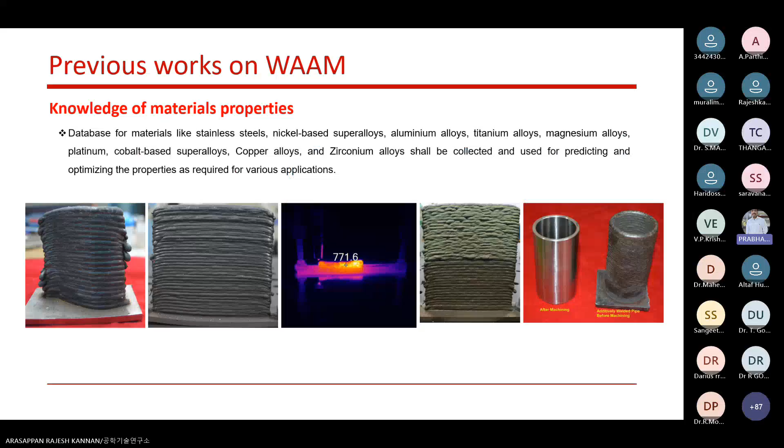ICT Academy's Mr. Altaf Hussain Khanday is going to give an interesting session on generative design workflow using Fusion 360. Fusion 360 is the first cloud-based CAD tool which integrates all aspects of design, manufacturing, and simulation, making this session very useful for design-oriented engineers.

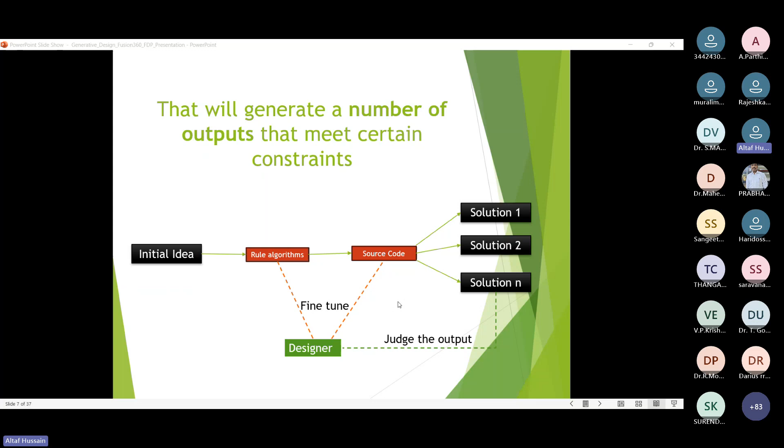So this is the process generative design follows. That's how we create design: we give an idea, the software works, and we get a design, right? And one more thing, this generative design, as I told, is an AI-driven approach. We give some conditions to the software and it gives us a solution. Before, we would first design and then test. We would create a design manually and then test it, so it was time consuming, right?

But now with generative design, we are just giving conditions to the software and it is giving different solutions to us. So we are simply exploring the designs, solutions, or outcomes. So it has saved us time. It even gives us an idea of what design will be suitable for you, because it gives us different options. So we can explore our outcomes and select the proper one, right?

So now generative design has changed it. First we were designing and then testing. Now we don't do that. We just define, it gives us solutions, and then we explore those solutions. And not only one solution; as I told you, it will give hundreds of possible solutions, and then we can compare them and get an optimal solution.

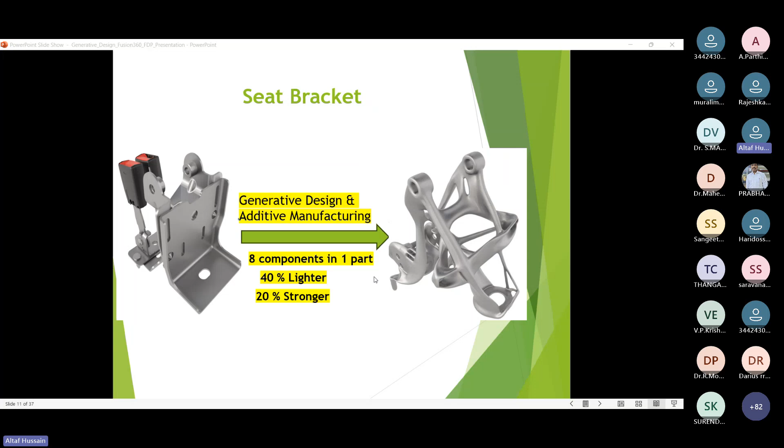As I told, there will be different solutions out of different outcomes. We can get a novel solution. We can work on that. If we want to do some modification, we can do that. And then we can create form tools, or we can create an organic structure. We can create some mesh designs, and then we will use that particular design for additive manufacturing and create a final product. I will show you those things practically. So for this particular component, we got different solutions, and from among them we selected the better one, right?

Okay, so now I will just go quickly to this one because it's more practical. If you see the evolution of design tools, in traditional CAD we were just using the geometry, manually creating sketches and then creating a design, right? Then we were testing that design. After that, we got topology optimization that removes unnecessary material. I will show you that also in the Fusion software, how we can remove the material, how it works, right?

But it is more time consuming than generative design. But it's very good. Actually, we are still using this shape optimization. Even industries are still using this one, but now they are trying to use generative design. But mostly they are using this shape optimization process to create a final product. So now we have generative design. It creates thousands of solutions, and it saves us time. So this is the age of generative design, right?

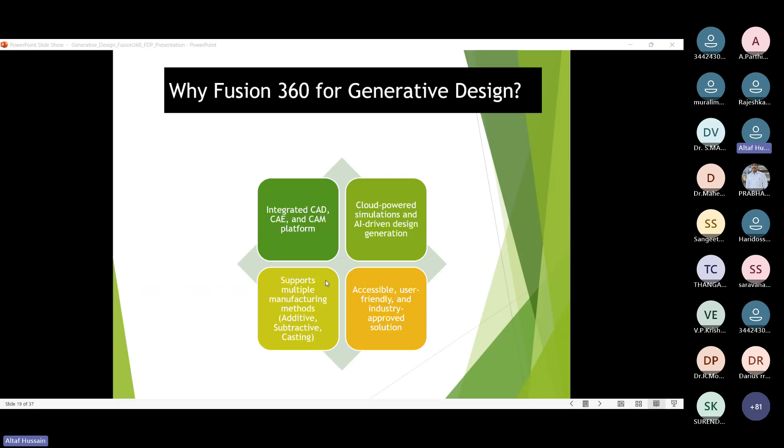This is the thing you do manually, one by one. You have to follow all the process. This way, you get a final design by using topology optimization. But in generative design, as I told you, we simply give some conditions, right? And we get a solution, and then we can modify that and create a novel solution.

So I will go practical with this one. I will open the software and show you first how we can do the shape optimization, because industry still uses this method. For generative design there are some challenges also. I will talk about that later, because we mostly use additive manufacturing for that.

For traditional manufacturing, we use milling or casting processes. But for generative design, we mostly use additive manufacturing. So there are these challenges, and that's why some industries still follow shape optimization. Let me now go to the software and show you practically how we can do these things in Fusion.

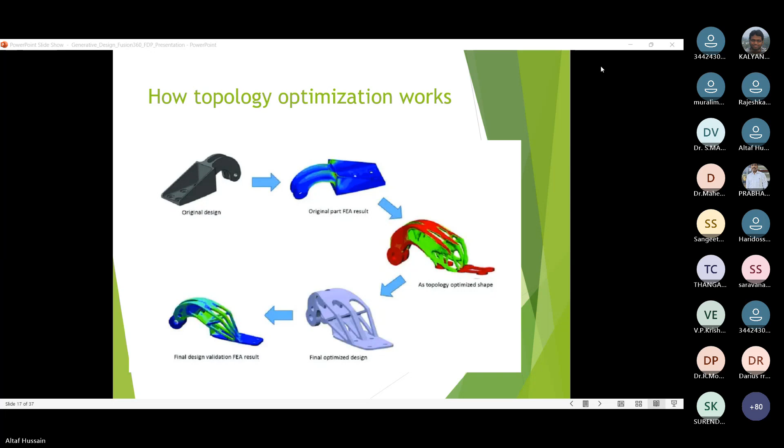I need to share it once again.

So this is the software. I hope everyone has this software. If not, as I told you, it's economical software. It's free for students or faculties. You can just create an account from Autodesk and use this software. It's very important, and you can do different things using Autodesk Fusion.

I want to show you first shape optimization, then compare it with generative design. For that, let me quickly create one design from here. I will select this reference plane and go for the sketch. Let me create some circles. I will create a wheel, do the shape optimization on it, and we will see the final results we get, right?

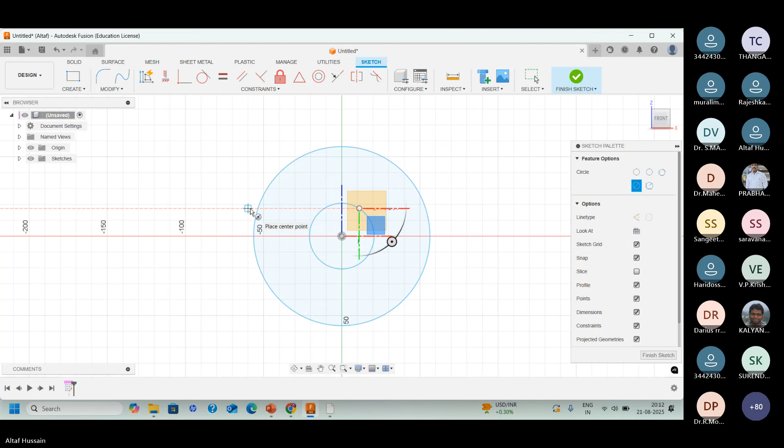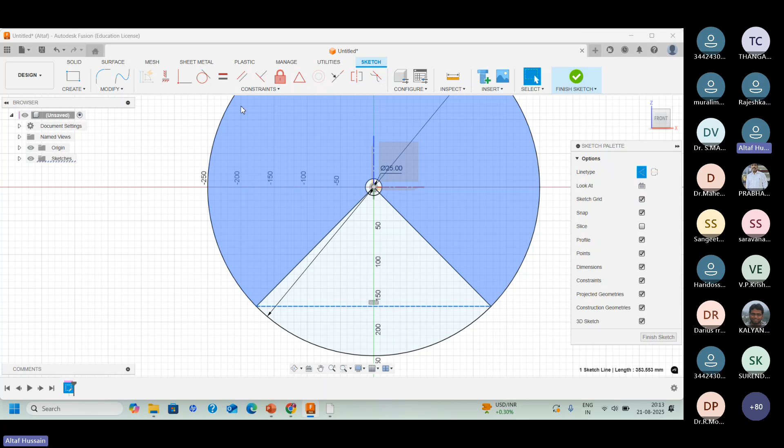I will create a circle, then one more circle of diameter. Before going on, I kept the units in millimeters. This I will give 25 mm, and for this one, 500. I will create one part of this wheel with a line from here. Make it horizontal, give some constraints. I will also give an angle to this one.

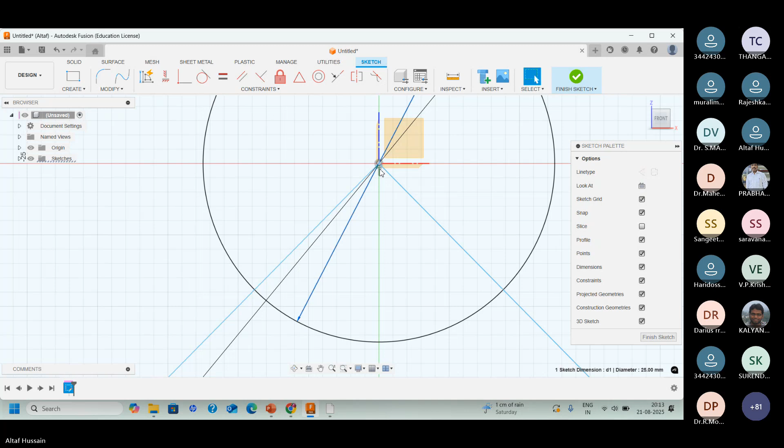Let me delete this one first. Dimension. Actually, it's auto, so I need to change it. Let me delete this one, because I have already applied a constraint. Once you apply another, it will be over-constrained. I hope you have used Fusion. You can just delete these if it happens, because it becomes over-constrained, so you have to define it properly. Let me delete this one also.

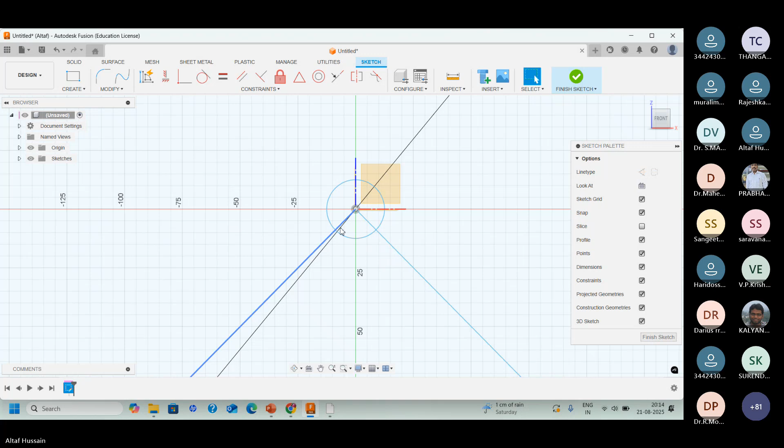Now let's give the dimensions: 120. And I will create one more line from here to here, make it horizontal, and make it a construction line. I'm just trying to create one part of the wheel. Now I can go to Solid and select Extrude. I will first delete this part, then extrude this one up to 50.

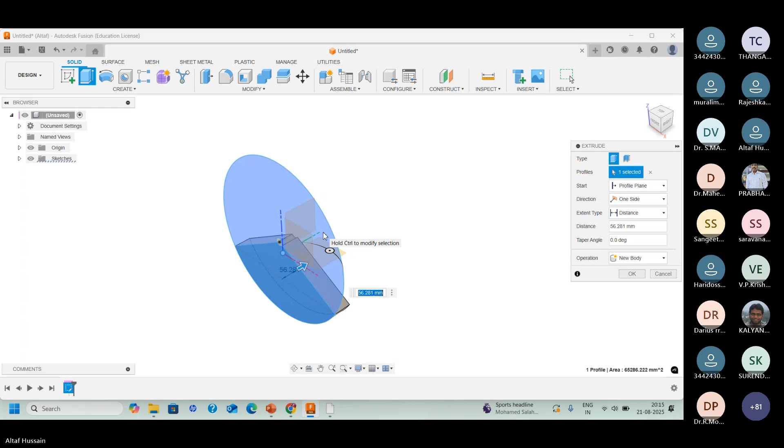We can get manually 50 mm. Okay, so you can see we are creating parts manually for the shape optimization. I have created this component, this part. Now I will go to the shape optimization. So how do I go there?

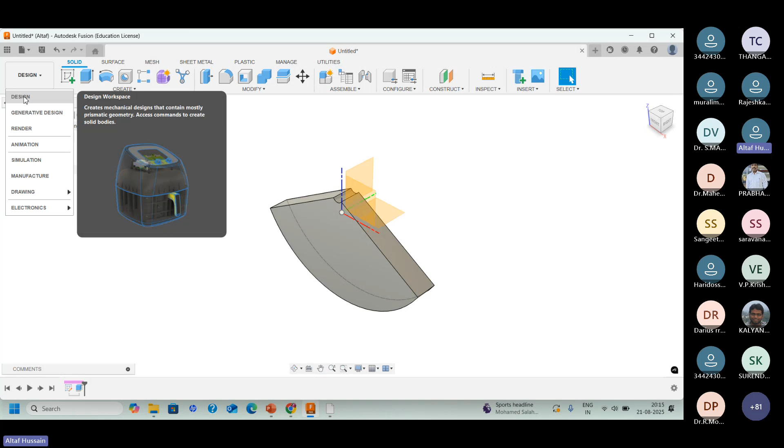You can switch the workspace here. We have a design workspace, then we have a generative design. I will come to generative design later; first I will go to simulation. Here you can see the simulation workspace. If I select the simulation workspace, you will see we have shape optimization. I will select this one and go for create study.

So I am now in the shape optimization workspace. Here also we have to follow some conditions. I want to analyze this particular design or this particular part. So I will go here and preserve some region. I will show you preserve geometry and obstacle geometry. These two tools are very important in generative design. Here in shape optimization also, they are useful.

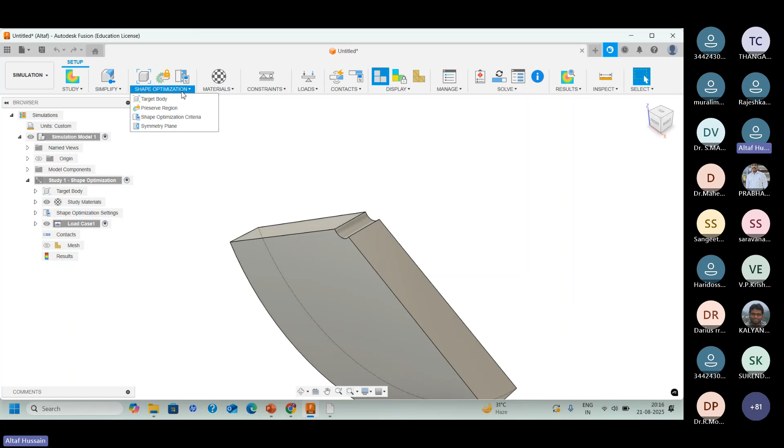I want to preserve this particular area, because suppose I want to insert some bearing or some shaft here. So I will preserve it, I will preserve the shape of this one. I will select this area and just make it 25 radius. So this area is preserved, fine.

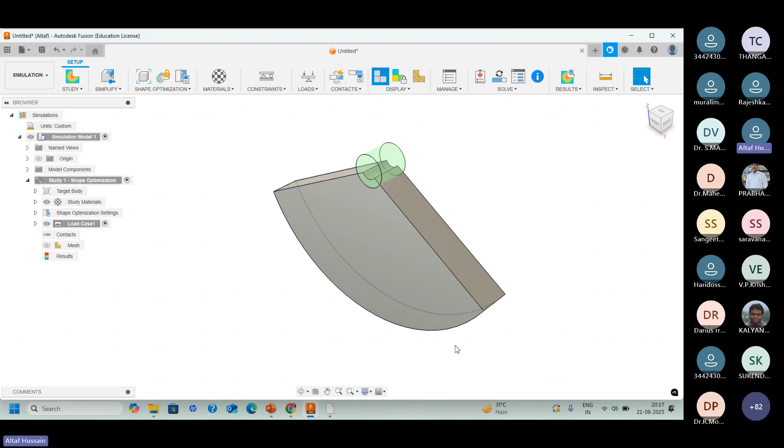Now, as I'm doing shape optimization, we are applying some conditions to this particular design, and then we want to see the outcome, the result of using shape optimization. So now I will apply load conditions on the perimeter of this wheel. This is the perimeter of this wheel. I will just select this one and apply loads.

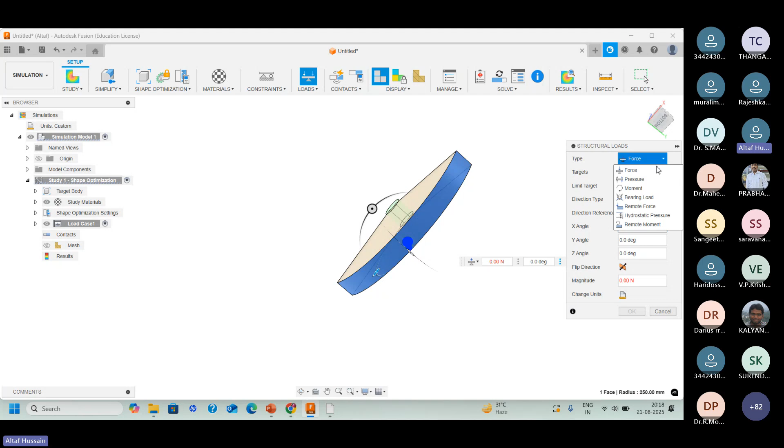If you see here, suppose let me apply the pressure, and the magnitude can be anything, suppose 10. I will get 10 value. Okay, fine. So I will select this one, and you can see I have applied some conditions to this particular component. Here I have kept this one preserved, and here I applied the loads. This load will be applied constantly on this part, the perimeter of this wheel. Fine.

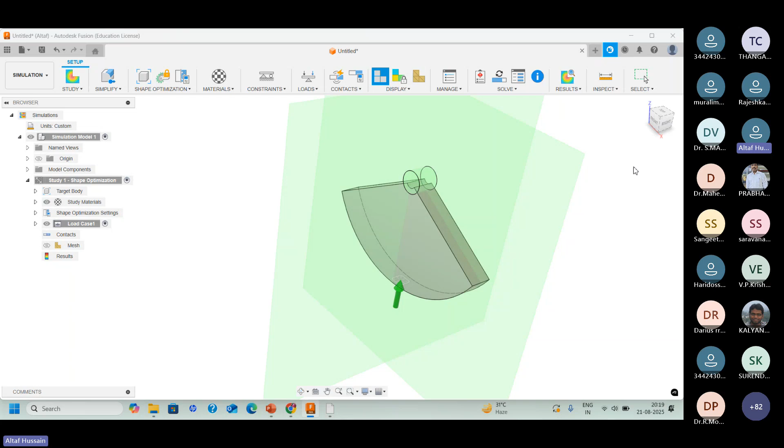One more important thing in shape optimization: you can see symmetry plane, so that there will be a balance of pressure applied on this part of the wheel. I will select this one and select two planes, active planes 1 and 2, so that a balanced pressure will apply everywhere on this part. Okay, so these are the things you have to follow in shape optimization.

There are lots of tools there, but I don't want to go into those, because my main topic is generative design. But I want to show you because shape optimization is the foundation of generative design. That's why I want to show you this also. You can see I have done this.

Now I want to go for the mesh. I will divide this component into smaller mesh, smaller parts. When you are using analysis software, we are using FEA, so we create smaller parts of our component so that we can get a good result. Let me just decrease the mesh size and click OK. Now I will go and solve this one.

So you will get a solution here. I will just generate this one. Just a minute, it will take some time. I have created a small part, because otherwise it would take so much time with a complex design. In this small part, I will show you how we can create different solutions, how we can modify the outcome of this shape design. So let me just... it's not.

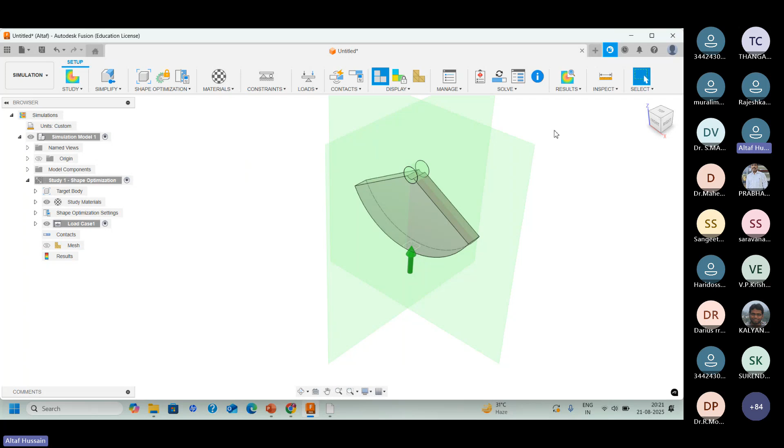Okay, one more thing we have missed here: constraint. There should be at least one constraint applied. So I will go here, constraint, structural constraint. I will fix this particular area and make it fixed. Now I can pre-check whether all are set. So now everything is set.

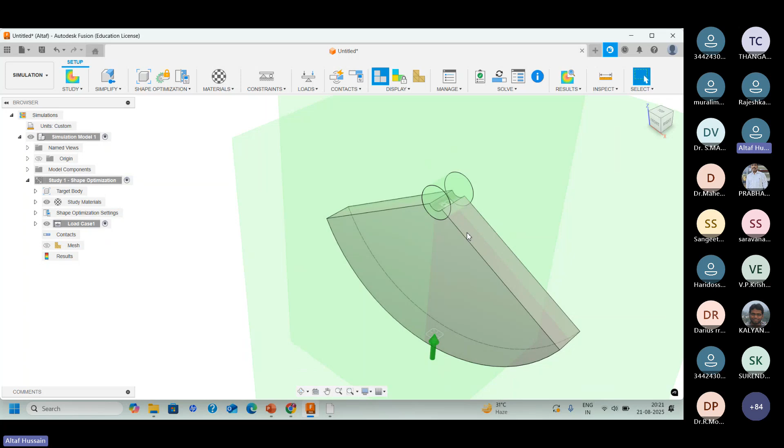I have followed all the conditions and all the steps properly. I will select this one, click OK, and now I can solve it here. I will get some solution. It will take just 2 or 3 minutes. Let me save it somewhere.

Okay, it will take some time, just 2 or 3 minutes, because I have just created a simple part. With that simple part, I can modify it and create a design. You'll get an idea of how we can create a design from an organic structure, a referenced image, or a general design. From that, we can modify and create a solid design, which we can then use in a manufacturing unit. It will take just 2 or 3 minutes to complete, and we will get a solution. With this small part, we can create some design, or I can say I can create a wheel.

Then I will go here. I will just move to the generative design until it gets completed. I will open a new workspace and keep it aside. If you want to do generative design in Fusion, here you will see we have a workspace called generative design. In generative design, I will explain what you have to do in Fusion, how we can create a generative design.

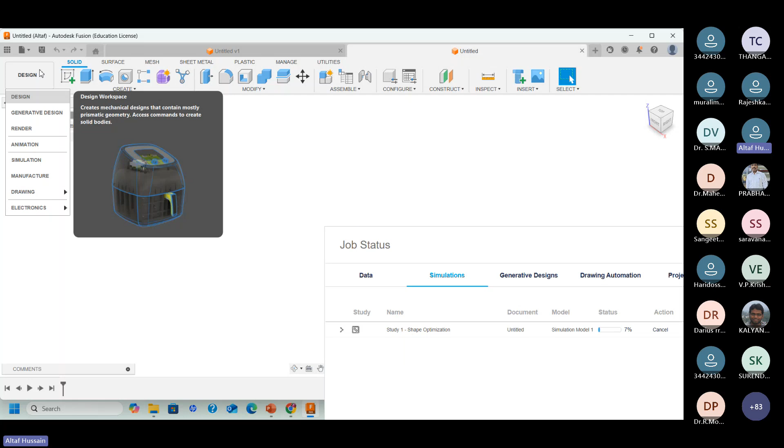As it will take time for me to create a design, I already have some designs available here. I will use them so we can see how we can create different outcomes by using generative design. Otherwise, you can try here yourself if you want to practice. You can get these things from the data panel also. Go to the data panel, scroll down, and you will see 'generative design samples'. You can click on that, and you will see different samples available in Fusion that we can use for generative design.

So here is a GE bracket. Actually, I wanted to talk about the GE bracket, but first I will complete one here, then I will talk about this - what is the GE bracket, and how it created the base of generative design. So here I will open the GE bracket.

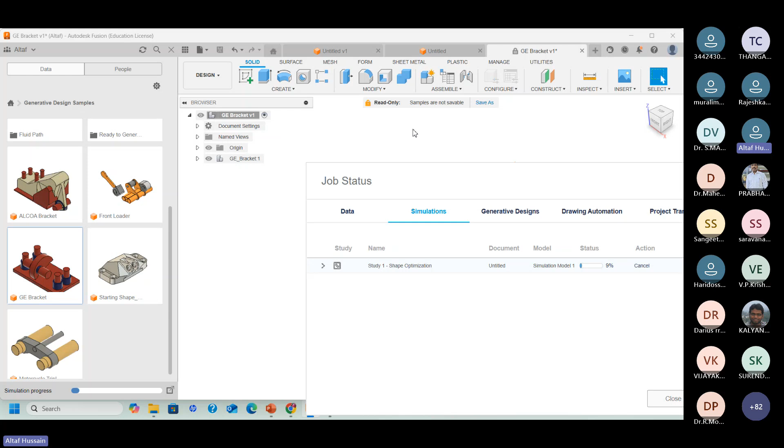This GE bracket is actually used in the aviation industry, in jet engines. So this GE bracket is used for that, for the aviation industry. I will later talk about the GE bracket also, how it has saved thousands of industries by using generative design, how they have changed from the traditional view of design to the generative design - by using the GE bracket.

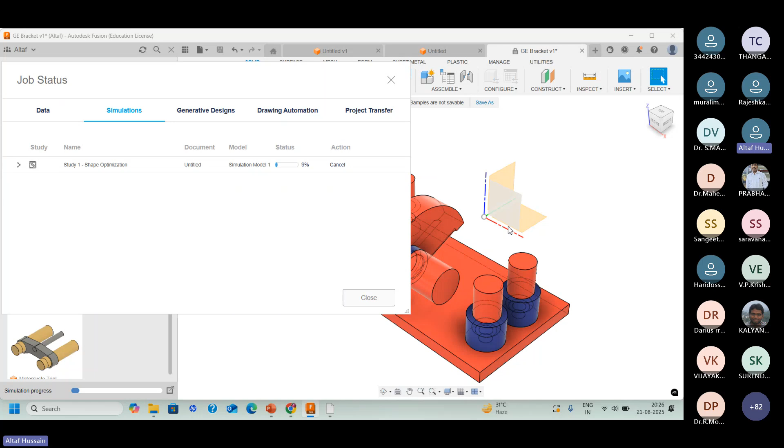Okay, so this is a simple image of the GE bracket. Only some components are there, right? Here we will be applying some load conditions to it, applying some parameters to it, and we will see how many solutions we get after applying these conditions to this particular body.

Okay, so here we have different things. We have to follow one by one. First thing, you have to save this design. As you can see, this is locked right now - GE bracket is locked because I just used this from the sample. So I need to save it first, then I can edit this one. I will go here. Let me first close this one. Later on, I will see this result.

Okay, so I will first save the GE bracket. Go here, file, and then we have save as. So I will save GE bracket in some location. Now it is editable, so you can edit this sample.

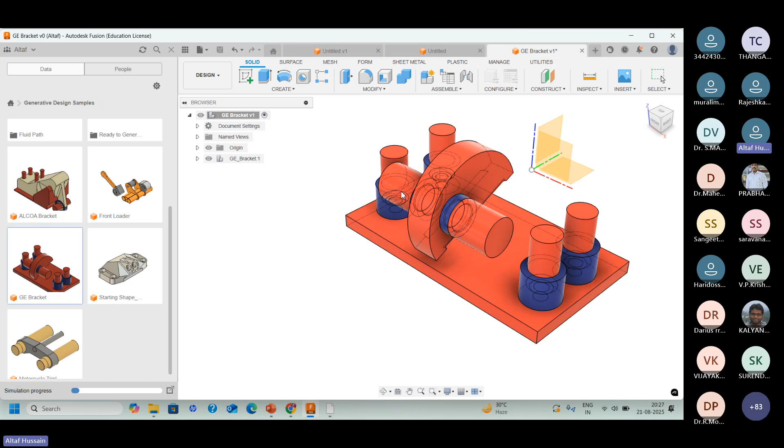Now I will show you how we can follow the generative design in Fusion. Here we have a generative design workspace, and you have two sub workspaces in generative design. We are going to do the structural component, so we will go to study case and create study. Here you will see different tools that we use in the generative workspace. I will show you one by one how we have to follow this.

If we don't follow properly, then we cannot get a better solution or a better outcome. We have to keep in mind that we have to follow all the steps properly, then only it can give us different outcomes with different properties or different solutions that we can then compare and get a design.

So you can see, okay, this one is complete, my shape optimization is completed. I will go to this result later on. Let me first complete this one also.

Okay, so you can see here you have to remember two things: preserve geometry and obstacle geometry. So what is preserve geometry? What things you want to preserve and what things you want to select as obstacle geometry, right?

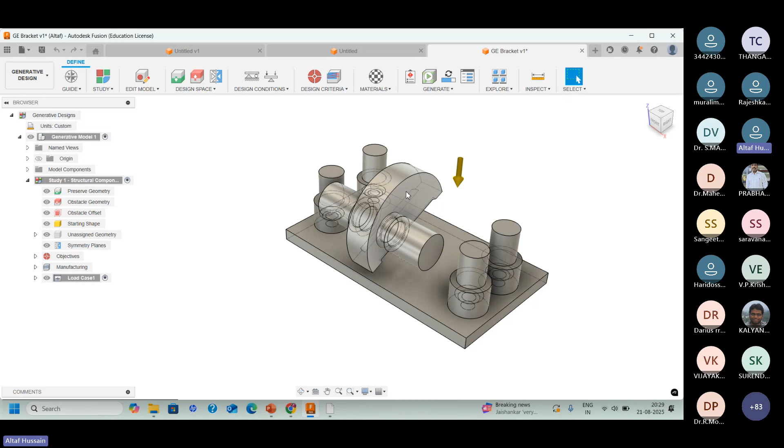As you can see here in this specification tree, you have preserve geometry and obstacle geometry. Preserve geometry is very important in generative design. You have to preserve at least one component. So what is preserve? What do you have to do? Why do we have to preserve?

If suppose I have this particular ring here, so in this ring I have this shaft inside, right? So I need to preserve this particular shape so that then I can insert this component inside to this ring or this shaft. So we have to preserve these shapes. We don't want any change on these shapes.

That's why we have to preserve them. If you don't select these geometries or don't want to preserve them, then it will go to deformation, it will go changes, because the software will think that we have to add material here also, so it will go for deformation. So we will get some change in these particular components also. That's why we have to see what things we want to preserve.

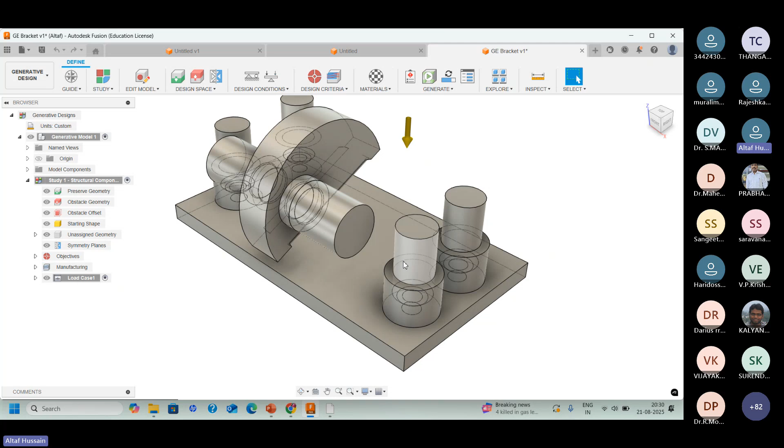We have to select those components or those parts. I want to save this, I want to preserve this part, I don't want to see any deformation on these parts. So I will select this one and this one. Here we have preserve geometry, I will select preserve geometry and select one by one what I want to preserve. I don't want to see any change on them.

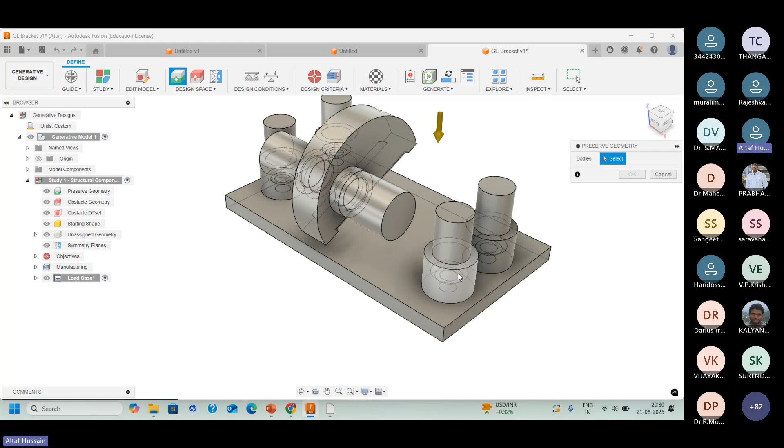So this one ring, and second, and this side also I will select here, because I don't want to see any change by software or some deformation on these particular rings. These 4 bodies I have saved. I can save this body or this ring also, because here also I have inserted this component here. So let me select this preserve also, 1 and the second, 4, 6. So total 6 bodies. These 6 bodies will turn green.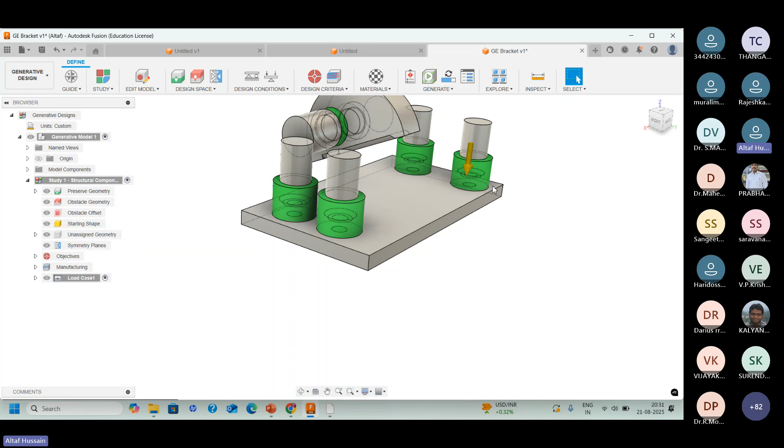That means you have preserved them, so this is a condition. I'm just applying this condition: I want my software to not do any deformation on this particular component or body or part. I don't want to add any material on this part, or I don't want to remove material from these parts. So that's the condition I'm applying to this body. And this is a preserved geometry.

Now obstacle geometry. I will give an example like a bridge. If you see the bridge, we have pillars, right? They are preserved geometry, so we don't want change on those pillars, we want those pillars to be the same. An obstacle geometry will be like that area below the bridge, where we don't want to add material or remove material on that particular space or parts.

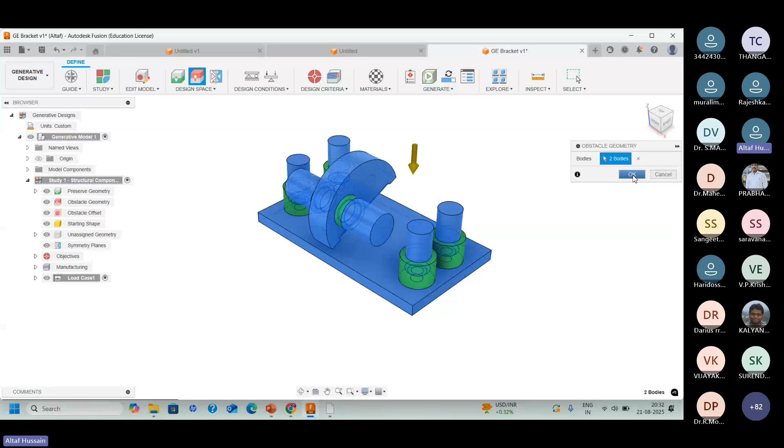So that's obstacle geometry, we don't want to remove or add material on those parts. So these are the preserve, and that's the obstacle geometry. I will go here to obstacle geometry, I will select this one and this one, so I don't want to add material on these 2 parts. So I have selected 2 bodies. Now it will take the red color, that means when it turns red in Fusion, it indicates that these are obstacle.

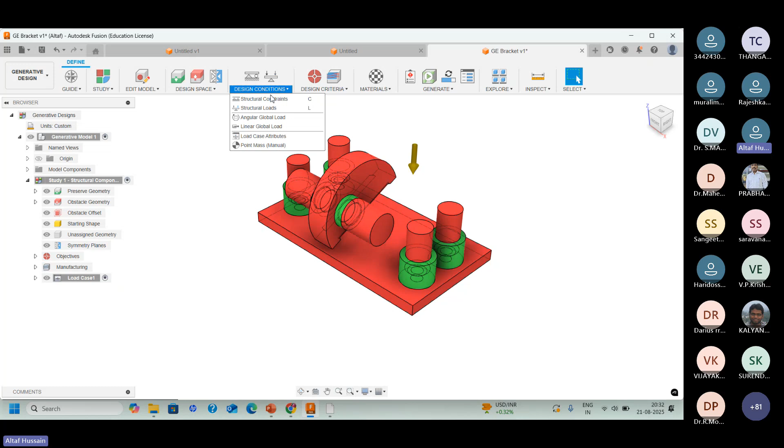As we are doing the study case of this one, here we have some load conditions, and we will keep at least one fixed. So we will go to structural constraint and make these rings fixed, because otherwise generative design may change their position, or we may see some deformation in this part, or they may relocate from other positions. We want them fixed, we don't want them to move anywhere. So I will just select this one and this one. These are the conditions that I'm giving to this particular design, and then the software will give me the solutions. This one I am fixing.

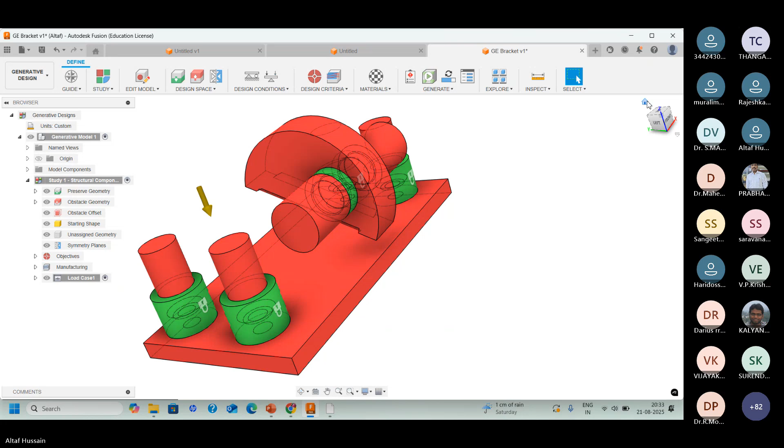Okay, so these are the conditions I have given, and these were the parameters I have given. Now there are other conditions also that I will give to this design, like loads. What kind of loads will I apply on this design? What will happen if I give different loads? Suppose I want to apply loads on this ring here. I want to see what will happen and how the solution will show me the result.

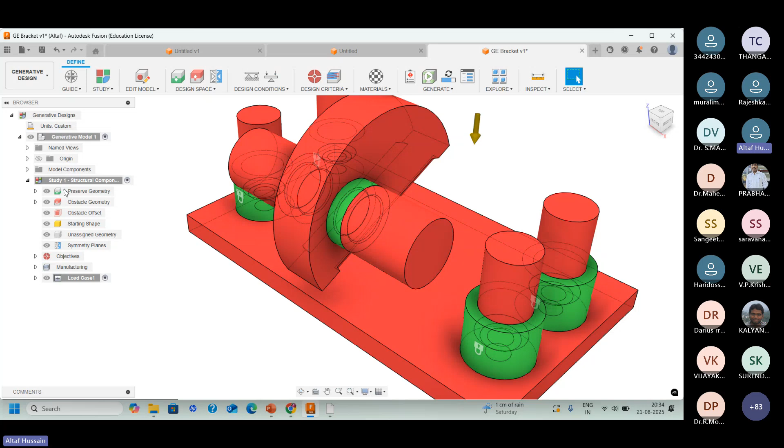So I will go to design conditions, here's a structural load. I will select that and apply loads on these 2 rings. Let me study different loads, load cases, so we can explore different results and compare them to find the proper design. So I will select, suppose, pressure or force on this ring. Let me hide this one here first, I will hide the obstacle geometry, because I want to apply loads on these two rings.

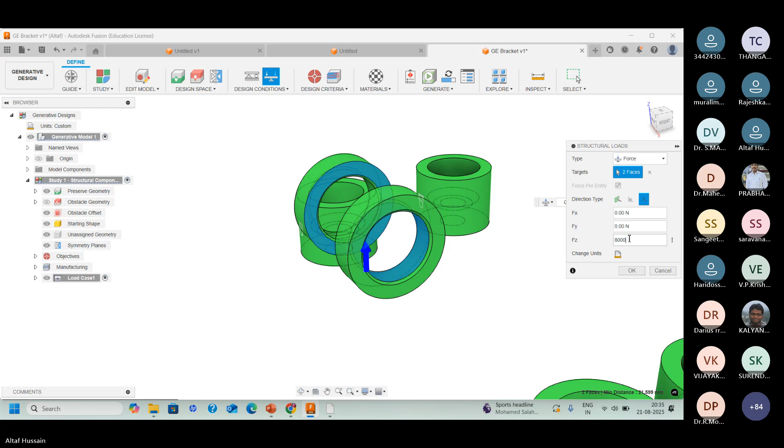I will go here, design, structure loads. Let me go force, apply on this ring and this ring. So here's the condition, I will go vector 1. Let me apply 1000 or 8000 Newton on these two rings. Finish. So this is load 1 that I applied here. If you see in this design tree, load 1 is here, case load 1 I have applied.

After that, I will apply one more load, or go for a different load case. So I can duplicate this one. I can right click on this load case, and here you will see clone load case. So I will make a different one, second and fourth one. Okay, so these are different load cases I create here.

I will then check and explore this load case also, what happens to this particular ring. Then load case number 3, if I go to this one again, I will just edit this, go to loads, and edit options there. I can select this one, instead of 8000, let me select 600 something, 6000 something, okay, 6357, I will apply for the z-axis, and this I will apply more, 7000 some. Okay, so these are load case number 3 and 4.

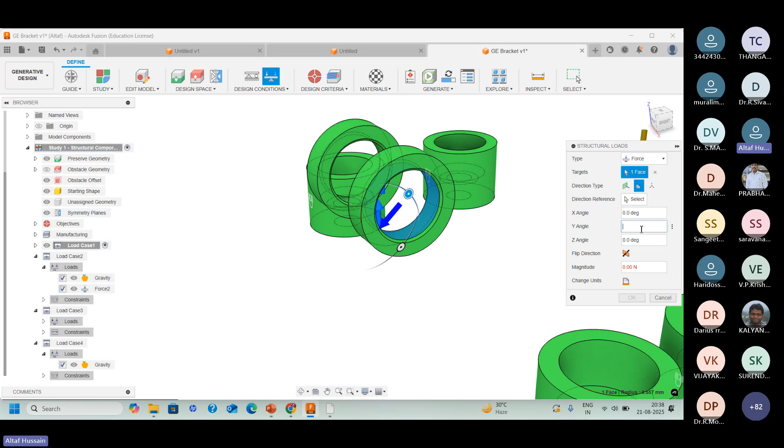First ring I would apply one load, then second ring I apply other load. So here the structural loads, let me go for the loads, this ring, and apply. Suppose let me apply, okay, I'll just apply 1400 for this one.

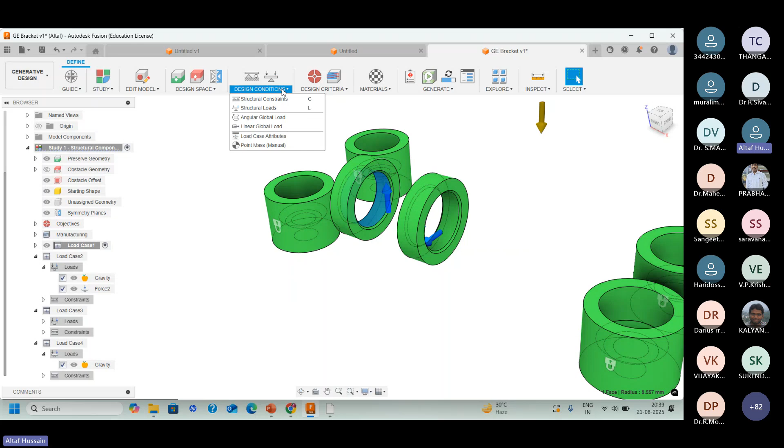So I'm just checking the different load conditions. I'm giving these so you can get an idea how we give the conditions or parameters to the generative design software, and it will give us outcomes. So these are the conditions I'm providing to the software. When I generate, it will give me a solution. Let me apply load on this particular one also.

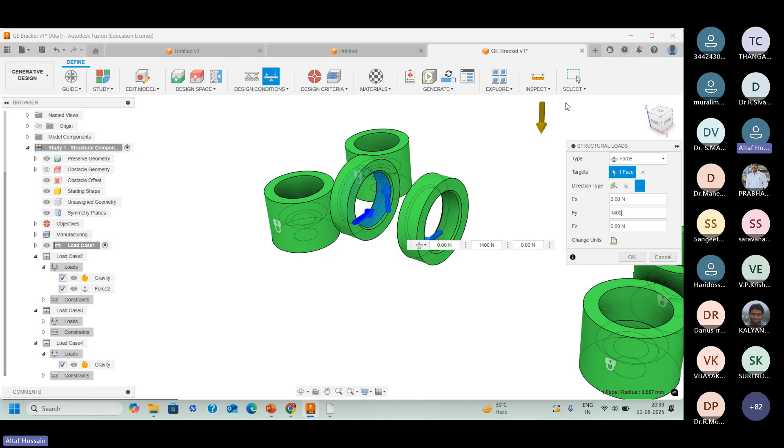If you see what parameters I have applied, first I applied the conditions—what things I want to preserve and what I want to obstacle. Then I applied the load constraints—structural loads, and also conditions for what I want fixed. So these are the load constraints I have applied.

Now the third one, design criteria—what are your objectives? What do you want by applying such conditions, and what do you want from the software to give you? So these are the objectives you have to set.

So I will go to objectives. My objective is: I am applying these loads, and I want a design that follows these loads, these conditions or parameters, and it will also minimize the mass, but the strength will be higher.

So here we have two objectives. One, minimize mass—you can go here and select minimize mass. And second one is maximize stiffness.

So if you select this one, then you have to give the safety factor also, and also what's your target mass—how much mass you want the software to create the design with. So you can give the target mass.

Suppose I want 400 or something—that's up to you, depending on what component or body you want to create, so that you get your target mass. You have to give that particular mass here, then the software will work accordingly and create that particular design with that much mass, and it will show you all the properties.

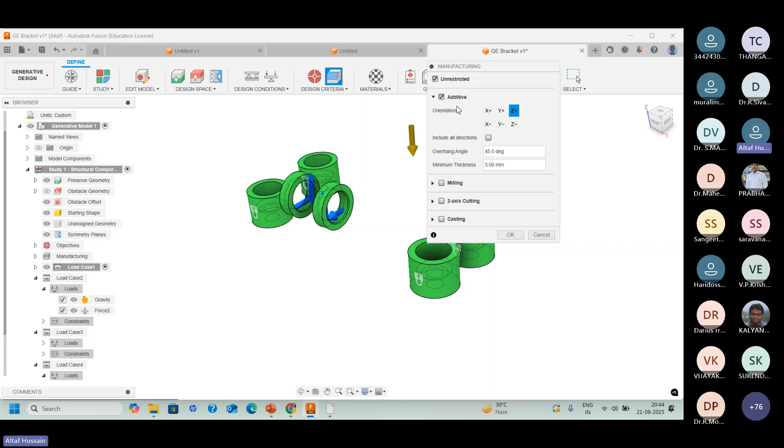If I want different axes, you can select that particular axis and it will give you a solution for that one also. Okay, so these are the preset conditions that you are giving to the software, and it will give a solution accordingly, right? Right now I don't want milling, I want just additive manufacturing. So I want a solution for the additive or 3D printing machine. So I will select this one and click OK. So these are the conditions that I have done.

After that, the most important thing is material selection. So what are the materials that you are applying or setting on the design, right? So I will go here, material. I will select that one, and you will see the material library will open. So we have materials available here. If you go to the material library, there are different materials available, fabric. Right now I want to go to metal.

So as you can see, for the GE bracket, we can use titanium, or we can use stainless steel. We have different alloys here, so we can use any material here. Let me select some material. For the GE bracket, we mostly use titanium alloy and stainless steel. There are lots of materials available here, so I need to select one. Let me check in this library whether I have selected one already. I will remove this one.

Okay, for the GE bracket, maybe we are using aluminum or AISI 405. So let me check if that's available in this library. Stainless steel. Okay, HR. This is one material that I will use here. This is 500. Let me use 490. Now for the GE bracket, I think we are using stainless steel AISI 405. I need to check whether that material is available in this library. That should be here. This is 4110. I need 440 or 405. So you will get all the materials available here.

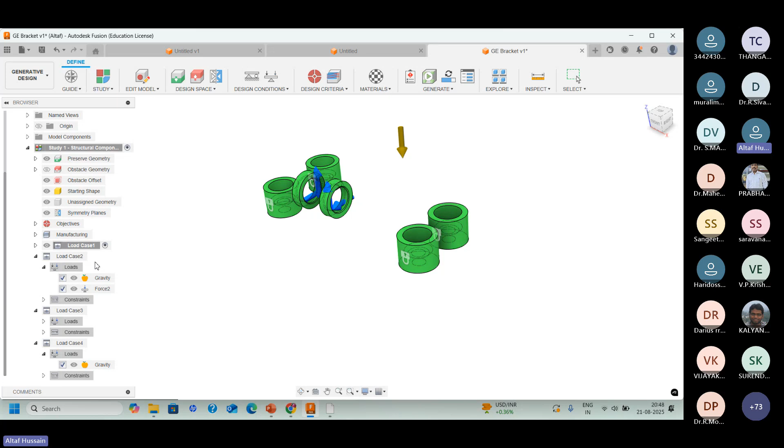And if you want to check what materials I have used for this design, you can go here, material selection. We have material model components. I need to go to manufacturing, I think. Yeah, you can see inside manufacturing there is additive. In additive, we will see materials. Right. So here in materials, you will see these 2 materials that I have used: titanium 6Al-4V and stainless steel. These 2 materials I have used for this particular design.

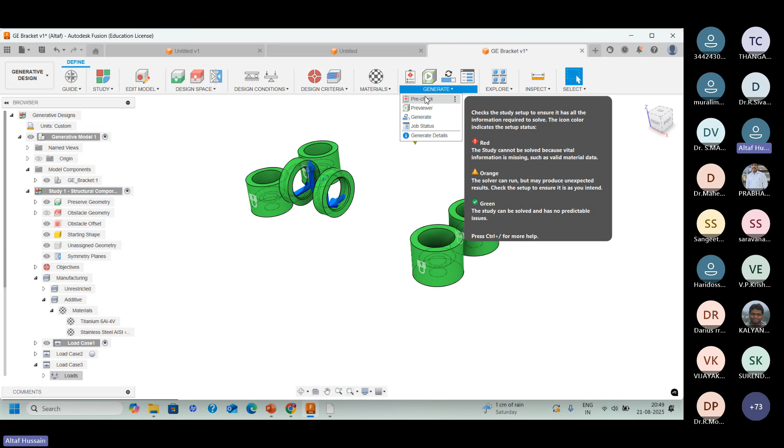Right. After that, you can go to pre-check. You can see whether you have followed all the conditions properly. If anything is missing, it will show you here.

Okay, one more thing: the load case 4, I have not applied the load, so I will delete this one. Let me delete load 4. It shows me that you have not applied a load in load case number 4. Let me pre-check it once again, and now all the things are set.

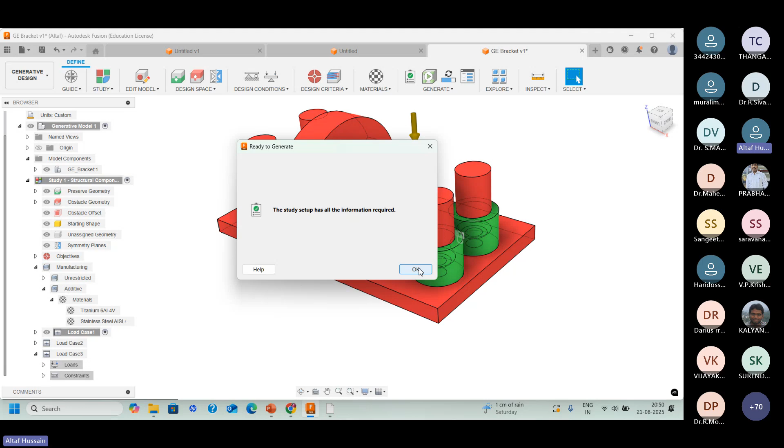It's showing that some bodies are hidden, right? So I will unhide them. The obstacle geometry is here, so I will just unhide that. And now go to pre-check and see, it is showing me that all the setup is done. So I have followed all the conditions that I want to see in my design, and it will now give the outcome. So let me select here, click OK,

and just go generate. Same way as we have done in the shape optimization, same way here in generative design also, but here you will get different outcomes. In shape optimization you will get only one. Let me generate here. It will take just a few minutes to get the solution. Till then, as I was working on a shape optimization also, I will just go to that solution till this particular solution completes.

Where was that one? I will check whether my shape optimization is complete or not. Yeah. So let me hide this generative design. You can see here, this is the shape result of our shape optimization, right? If you look at this design, if I go to the front side, and if I go to the mass ratio of this shape optimization, you can see how the mass affects how your shape gets, right?

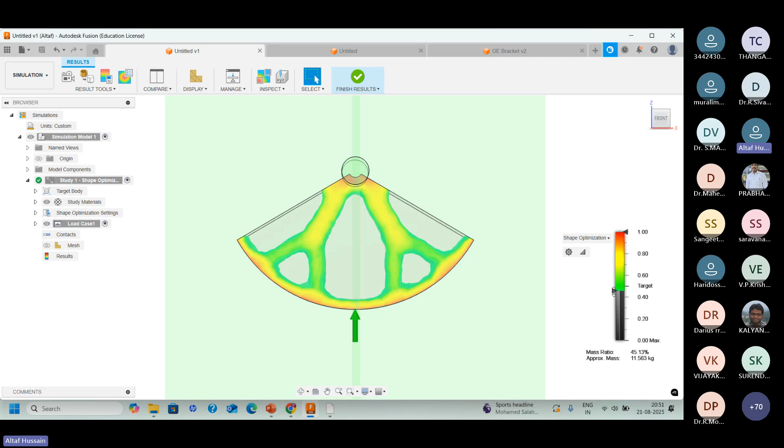Let me increase the mass up to this 0.4 mass ratio. And here, this particular shape I got by using shape optimization. Okay, now I switch again to the shape optimization till my generative design result comes. As you can see in shape optimization, I got this particular shape by applying some parameters, some conditions, this one solution. You can now select the particular design from shape optimization.

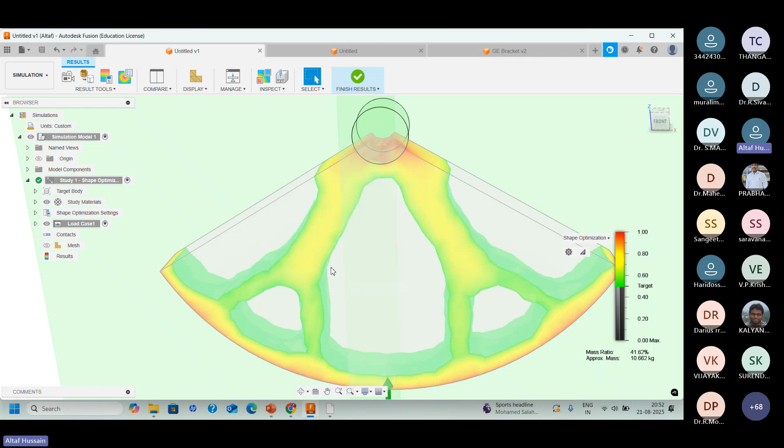Suppose I want this particular shape, and I want to modify this shape, or I want to create a better design by modifying this particular shape. Or suppose I want this one only, and I want to do some small changes on the design. So how can I do that? You can see we can hide here. Let me hide this shape optimization, and this also. I want to keep this particular design only.

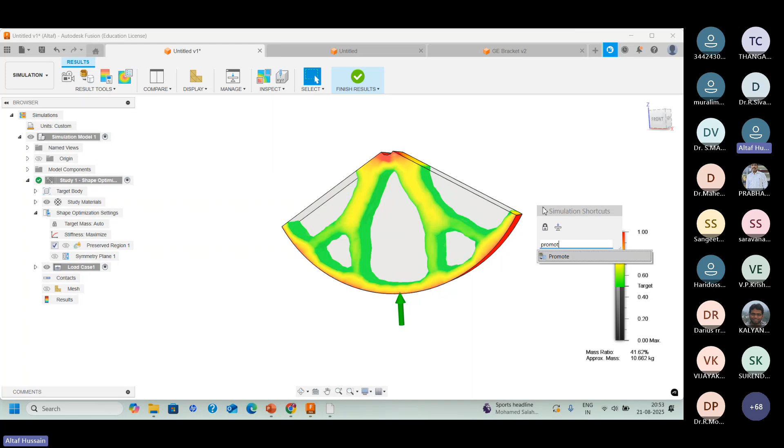So here's one tool that we call promote. If you just type S first, then you can go to the promote tool, and you will get promote here. What I want actually, I want to use this particular shape. It looks like an organic shape, and I want to use this as a reference. Then I want to create a shape from this particular optimized design. So here I will go to the design workspace.

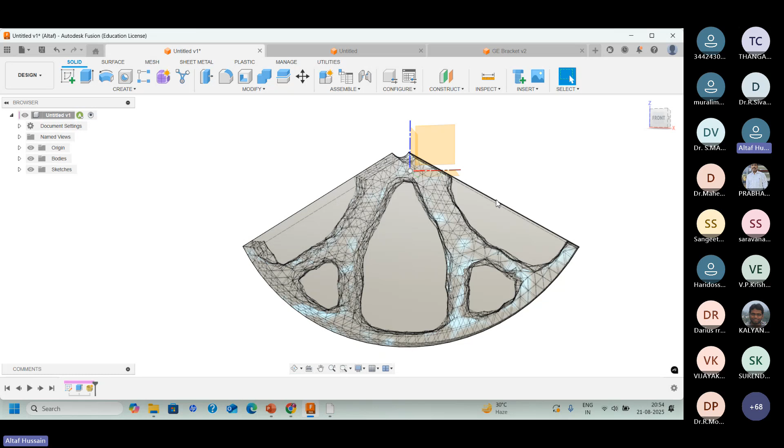I will click on the design workspace and select OK, and I got this kind of meshed design, right? From optimization, we are getting this kind of solution. Then we are using this solution as a reference, and creating a novel solution from this reference, from these optimized shapes. As you can see how time consuming it will be, you are working on a particular design only, modifying that and creating a solution. But in generative design we will get different solutions.

That's actually in process. Once I get a solution, you will see there will be different solutions already, but here in the optimized shape we have only one. As I will use this reference, let me hide the body, and you can see this particular shape I can use as a reference, and I can create my required design, or I can modify this particular design.

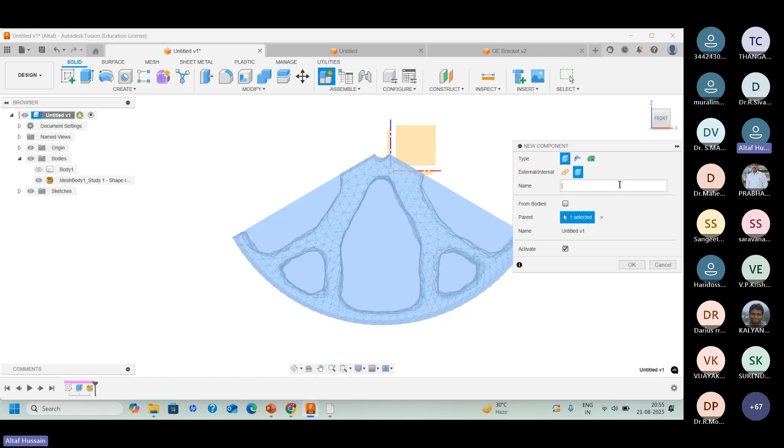Okay, so I will go here, right click, and create a new component, because I want to use this particular optimized shape as a reference design, and I will create the same kind of design. That's how we are creating by using an optimized shape, by using an optimization or simulation process. New component, and then let me give it some name. Suppose optimized shape, and create new.

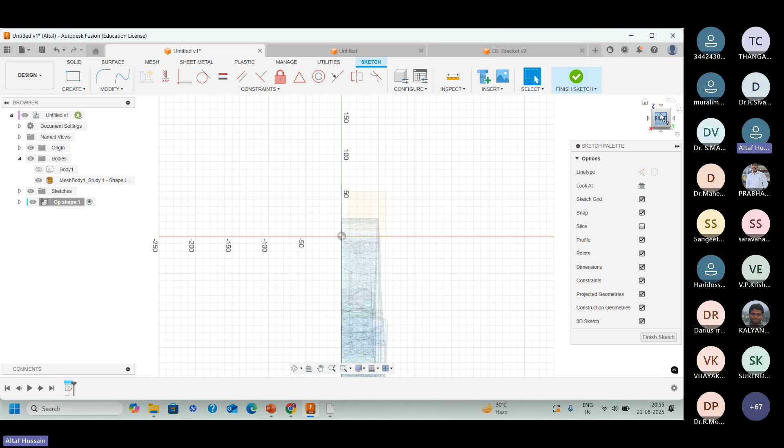Fine. So this will be a reference. So now I will select this particular face, select this one, and go for create sketch and use the front plane. Okay. So I will use this one. I will create from half of this one. Let's use a line tool for the reference purpose. One more thing. Okay, I will just undo this one.

As I already have some sketches available there, I will go to the sketch. Let me go to the body. Where are those sketches? I will reference them. So these sketches are there already. So let's create those reference sketches by using the circle tool. Right, one circle and then one more circle was there. This much, this circle. Fine.

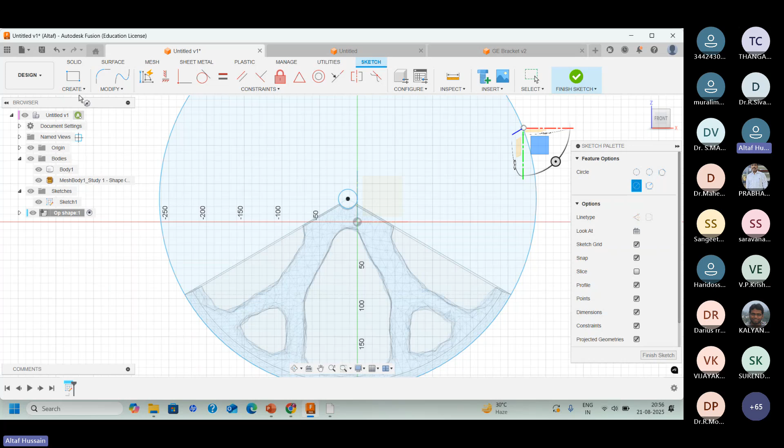And the same way like we created the first profile, after optimization we are creating the other profile, following this reference optimized shape, right? And we are creating this design. Let me go here, same way like we have done. Okay, actually this one I have not. Okay, that's this. Fine. If you want, you can drag it. And then I create a line here. So you can just follow this, you can use this reference.

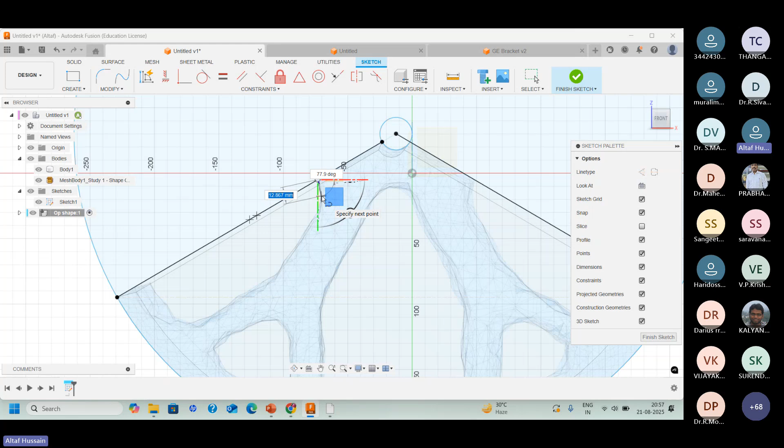Maybe you have seen some organic structure, some shape or mesh references, or in reverse engineering how you follow images of a design and use those as a reference, then create a design. Same way here in shape optimization, if you want a better design, we can use them as a reference and create a better design. Like this way, I will use it as a reference.

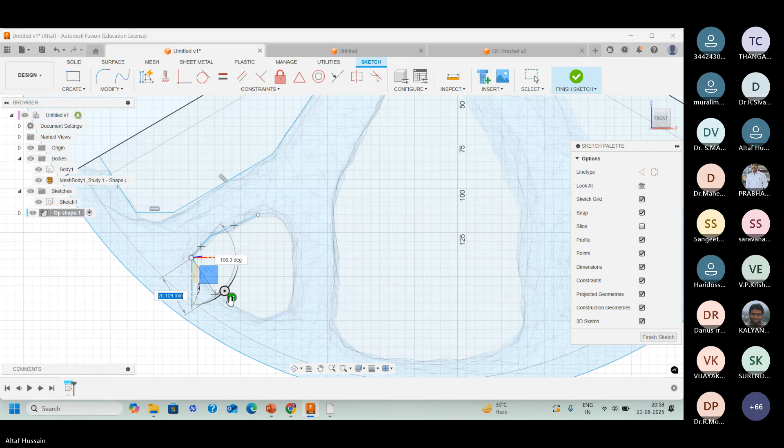In reverse engineering also, we do the same way. There we just insert the image or the meshed design or organic shape, and then we follow it. In shape optimization here in Fusion, we follow this kind of thing. Okay, let me select from here also. Select one line from a particular straight part of this one, and I'll follow here. I'm just doing this quickly. Actually, it's a huge thing in shape optimization, but we don't have that much time, so I'm going quick to show you some result.

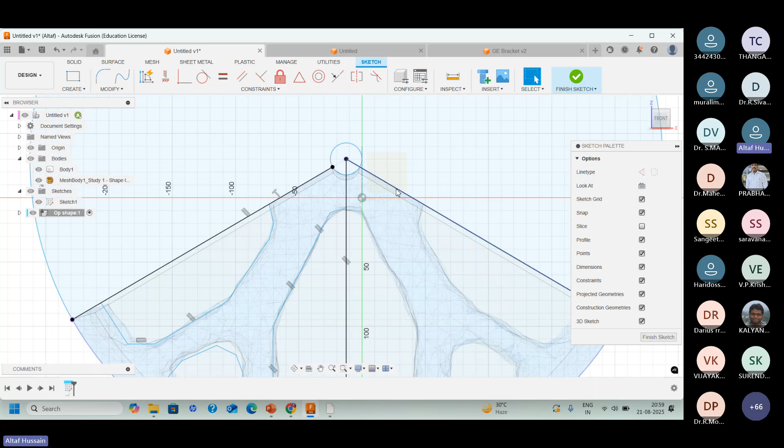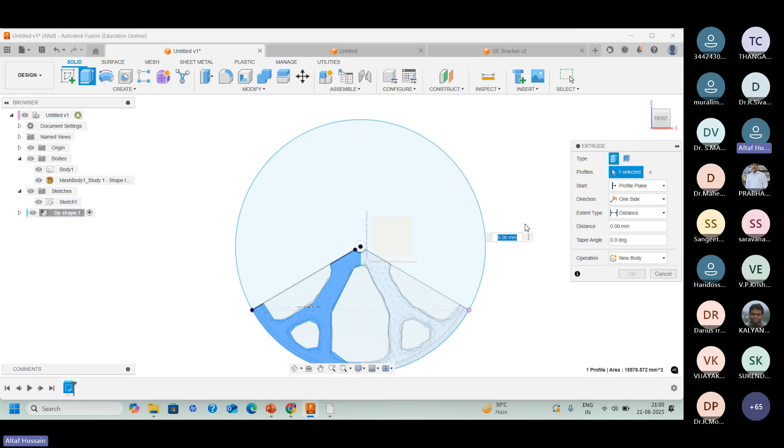Let's delete this one. And I will trim this thing. Okay, extra things. So just deleting these parts. Fine. So I got this particular shape here. Now I can extrude it. Let me extrude this part up to 20 or 25 or 50. We go isometric and select, drag it up to 50.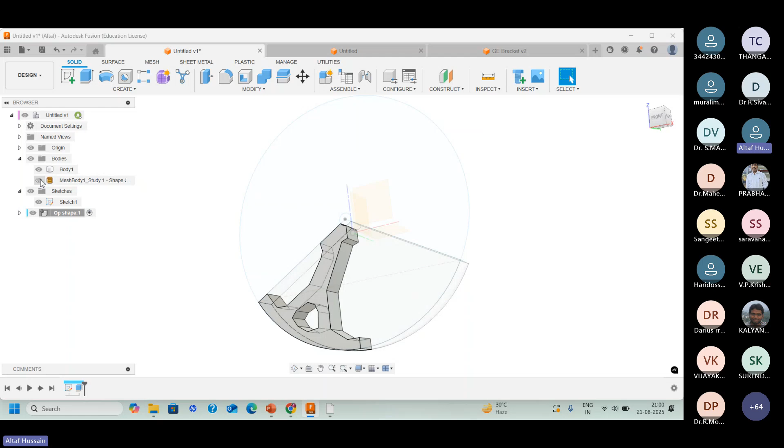Right. So this shape I got, you can see here, if I just hide this particular meshed design, I got this particular part from the optimized shape. And now I can mirror this one and make a full wheel. Let me mirror this particular part by using this face, not this face, by using this face. Okay. Actually, it's far. I will mirror it from this face.

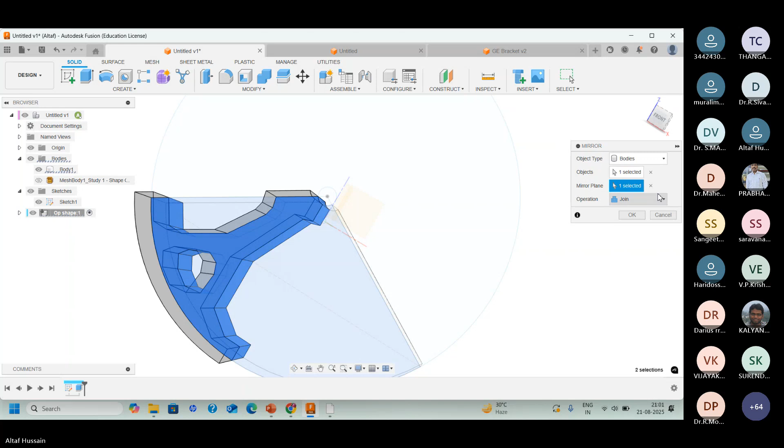Or I will use the circular pattern of this one. Instead of that, let's go for circular pattern and create 4 circular patterns there. Select this one and select the axis. Selected the wrong axis. Number of 4. No, actually there's some mistake here. I have deleted this part also. I need to keep this one.

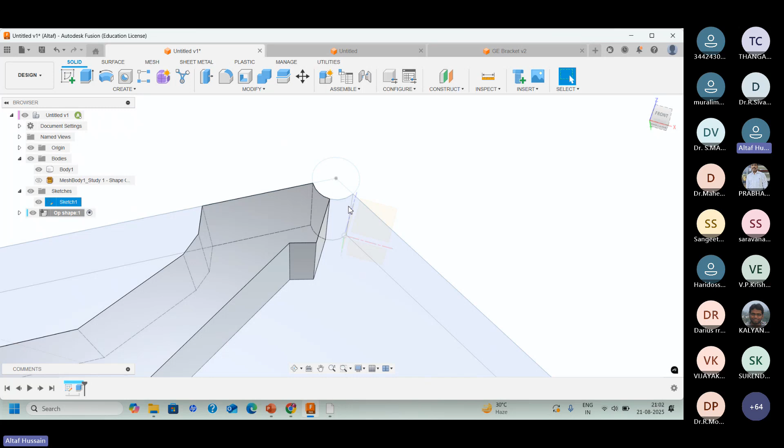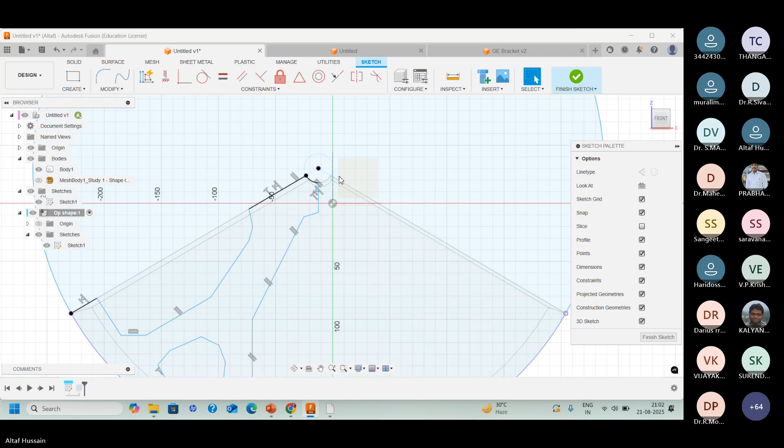I will go here in the sketch, extrude. Otherwise I go to the sketch here. Let me go once again to this one. Body, sketch, this sketch. Double click on that and go for create sketch. The circle should actually be on the center. I have created this one here. Otherwise, I need to create a reference plane around that axis.

There was axis there. We can then make them combine. Otherwise, I need to create one by one all the components. So I have deleted by using this line. It should be from here to here. Let me now revolve or

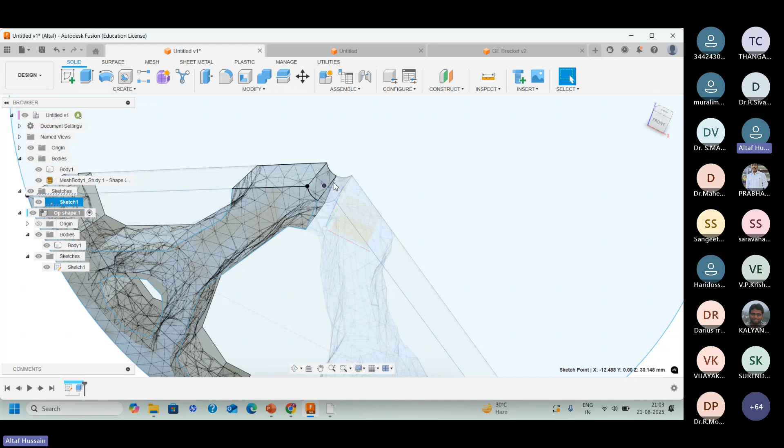finish. I have not defined this particular sketch, so it should be actually using this origin, so that I can use these reference planes as a mirror and as well as axis for a revolve or a circular pattern. So it's some distance from here, from the origin. If I just analyze this, you see here the origin is here and my circle is here.

So I should have defined this circle on this particular origin, so that then I can use these reference planes for creating mirror as well as circular pattern. But they are far from this center right now, so I cannot use them. Either I need to create an axis here or I need to create a reference plane here. Fine. So let me now go here.

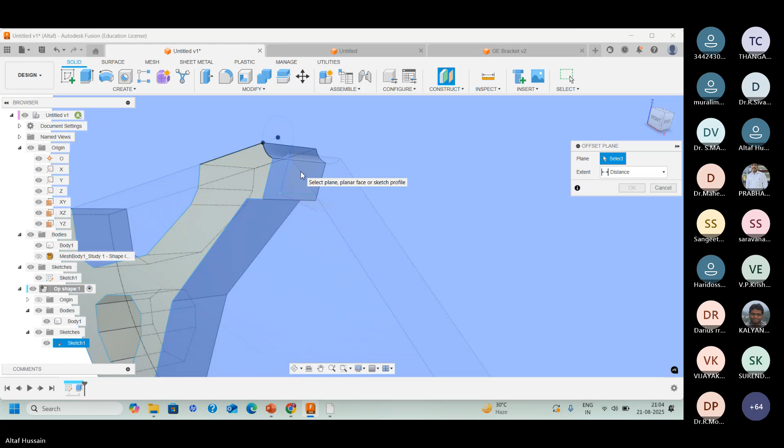I will create a reference plane. I need to add one more thing here. So I go here, inspect, construct. So here's a create an offset plane and select the body. Let's hide sketch. Let me just complete this first one, hide the sketch. They are just disturbing this. Okay. And here you will see.

Okay, so I'm doing one thing. I want to create a circular pattern, but what happened? I have created a circle. I have not defined a circle. So whenever you are creating profiles, whenever you are creating sketch, first define that profile, make that fully defined with respect to origin.

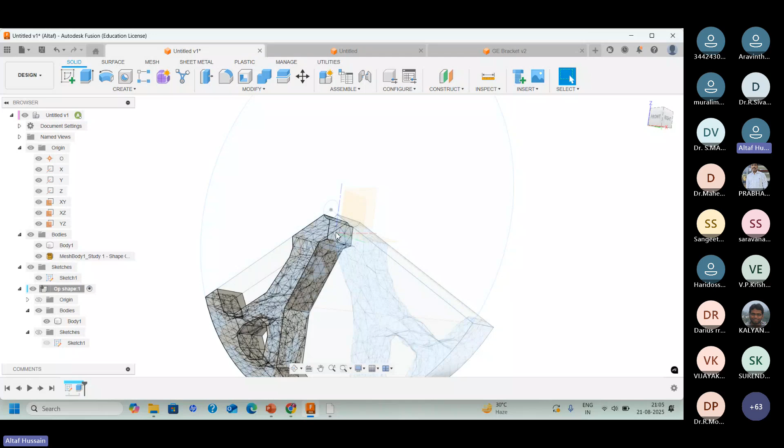Okay, so that means you are just suspending the degrees of freedom of a particular profile with respect to origin. So what I have done, I have created profile, then I have not given the proper constraints, and I have not defined that profile with respect to origin. So if I had created this profile on this origin, I could now easily use these reference planes for mirror as well as circular pattern.

I need to create now again mirror mid plane, and also I need to create one for the axis here. So it will take time. So we don't have that much time. So right now I got this part. I can just mirror it one part. Otherwise I need to go once again. I need to select, here's one more option.

If I just go to sketch, right click on the sketch, and then you will see here we have a configure, or we have a redefine sketch plane, right? So in redefine sketch plane, if I want this particular sketch to be in another plane, we can then select that particular profile in another plane. Automatically all my design will go to that particular plane, right? But right now I don't want to go into that particular topic.

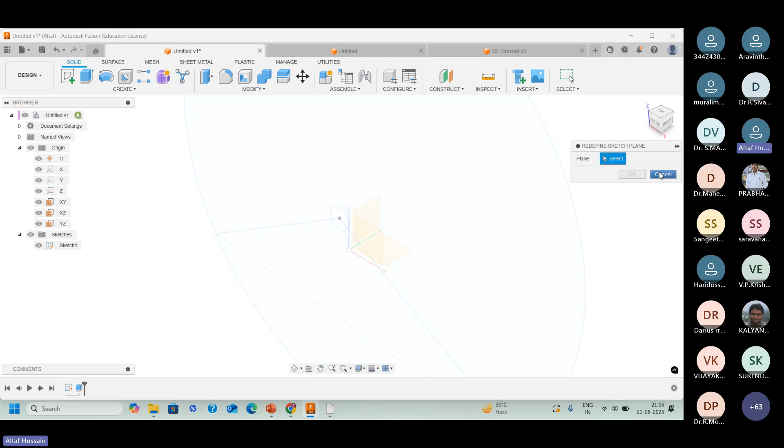So I hope you got here one particular design or particular part from the shape optimization. So this was shape optimization. I got one component, right? And if you go now to generative design, and if I go to solutions in generative design, explore designs, explore outcomes, you will see we may have different solutions. As this has been completed, you can see now different outcomes will be there.

Okay, so you can see we have here different outcomes, and we can compare them one by one. Like we have here outcome 1, 2, 3 and 4. And it's just loading. Okay, see how many outcomes I got from applying some conditions, right? So these are some conditions that I applied, and I got this kind of loads. Now I can compare the result. So here are different ways to compare.

Suppose I want to sort these outcomes by material, or by generative model, or by mass. So here you can sort these solutions. Suppose I want to sort by mass. So I will select here mass, and you will see for this particular study one, mass is 0.385 kg, right? And for the second one, the mass is 0.388 kg, right? In that way you can see different ones.

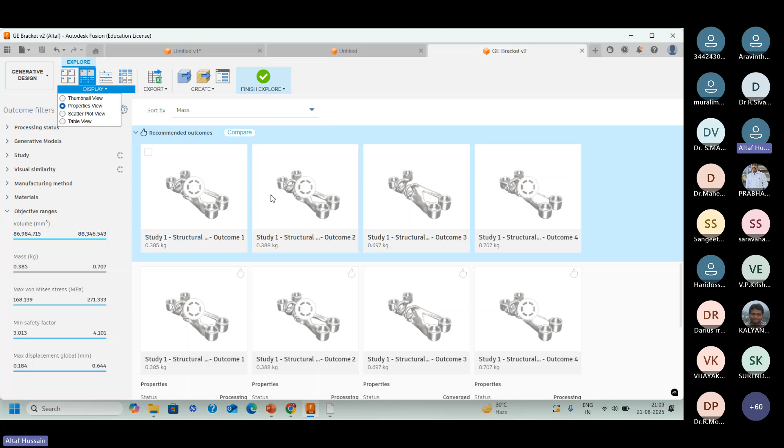Here we can see the thumbnails of the outcomes, and we have properties. Using properties, you can select if you want to compare, just tick on this one. Suppose I want to compare outcome number 1 and outcome number 2, you can just compare, and then here we have a table view.

In table view you can check what materials we have used. Suppose for titanium we have a recommendation of 92.5%, and you can see different solutions for this. You will get results accordingly. You can select that: suppose volume will be this one, mass will be this one, and safety factor. So whatever conditions you applied, these are the solutions we get, and you can explore all the results one by one and select whichever suits you, and use that particular design for manufacturing.

So suppose I want this outcome, solution one, I can select that one, right? And then here's the option, I click it here, and you will get that particular design.

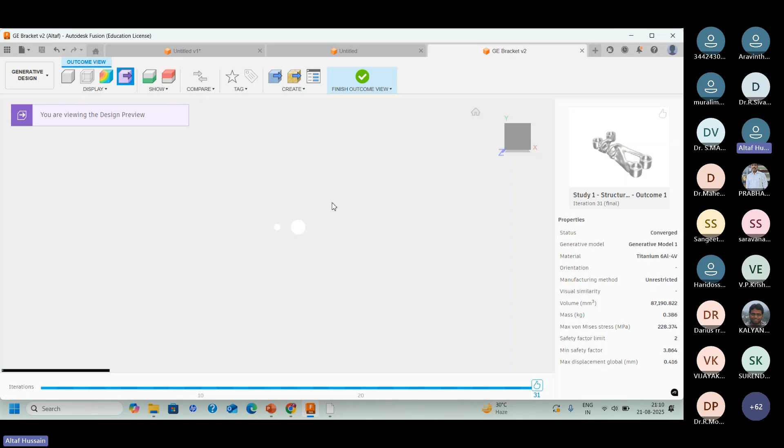Then you will go to parametric modeling. You can go to the design workspace, and if you want to change some of this design and conditions, you can use these tools, or the create tools, and export that as a mesh for 3D printing, or use design from outcome. So you go to design from outcome, open the design workspace, and from there you can modify and export for different manufacturing, whether milling process or 3D printing.

So I need to... actually it's already, sorry, 9:11, so I will now conclude the session. I know this is very advanced, there are particular things, and at least learning this, it takes 1 month to learn generative design properly.

But I tried to just touch all the important topics in generative design, so that you get some idea how we can use generative design in Fusion 360. That's it, now I have missed some topics.

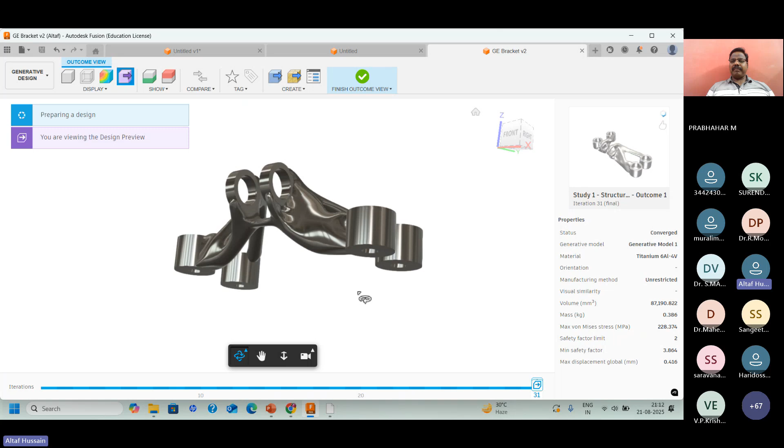I was thinking I would talk about GE brackets or other things also, but we don't have that much time. So if we get any other chance, any other time, I will try to cover those things. I showed you these things because the software takes time to complete the process, so we cannot go too fast. It takes time in Fusion to get solutions, whether you are doing shape optimization or generative design, it goes to the cloud, so it takes time.

So now I have just concluded this. I hope you got some idea how we can do generative design. I was thinking I would show you how to create a design using solid tools from this generative design, but we don't have that much time. Anyway, I hope you have learned something from the topics I covered.

That's it, so I will now... no, I'm open for questions if anybody has any.

Thank you, sir, thank you, sir. Really, it was a nice presentation, and I understand it is very difficult to cover the entire module within this 1.5 hours. What best we could cover within this duration, you covered in an excellent manner, sir. It is a wonderful thing, and people may get very good awareness about Fusion 360, as many people don't understand the advantage of using it. You explained it nicely; now they understand why people say it is an integrated software that can do all the design, manufacturing, and analysis process in a single software. So it is a nice presentation, sir. Also, your topic is very much aligned with our FDP theme, lightweight structural component design. I hope all the participants got useful information in this session. Now this session is open for the questionnaire round. Participants, if you have any questions, please ask now. I also saw some questions in the chat box, sir.

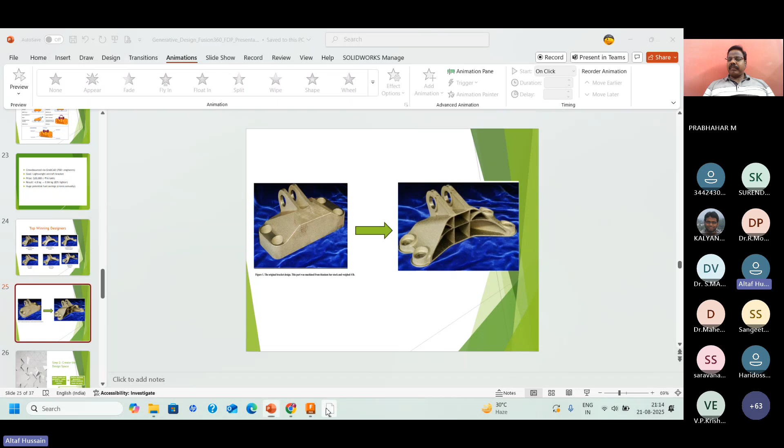Okay, somebody is asking me which one is more precise. The answer is Fusion. Actually, before that, there's also one question, sir.

ANSYS is particularly used for analyzing the design, right? But Fusion is integrated, a package of different workspaces. So we can analyze, do generative design, create parametric design, do simulation, digital form—we've seen different things we can do in Fusion.

But for the analyzing process, ANSYS is good. Fusion is a vast software, so you can do lots of things in Fusion. I can say Fusion is best if you want to explore different things. If you want to stick only to analyzing, then ANSYS is best.

Yes, actually we have a customized material also. We can select a customized material in our design. In Fusion we have lots of materials available. If you see those materials, I think they will be available in that particular library also.

We have a lot, and Fusion is also getting updated monthly. So they are adding whatever things are missing, updating the software, and adding material if that material is not already there.